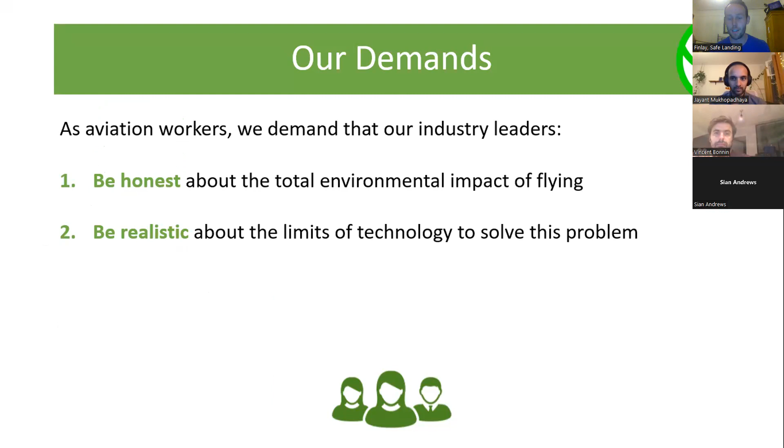We've got kind of 4 demands as a group of our industry leaders, of our business leaders. The first is to be honest about the environmental impact of flying. The next is to be realistic about the limits of technology to solve this problem. And this is where the talk from Jayant comes in today, looking at electric aircraft, which is often proposed as one of the solutions to the CO2 problem of aviation.

Then we want to be transparent about future regulations, what regulations are required to reduce emissions, and not lobby against those, crucially. Next, to have a plan that accounts for this and supports workers through any transition, because we think there needs to be a big transformation of the aviation sector and of the way we travel.

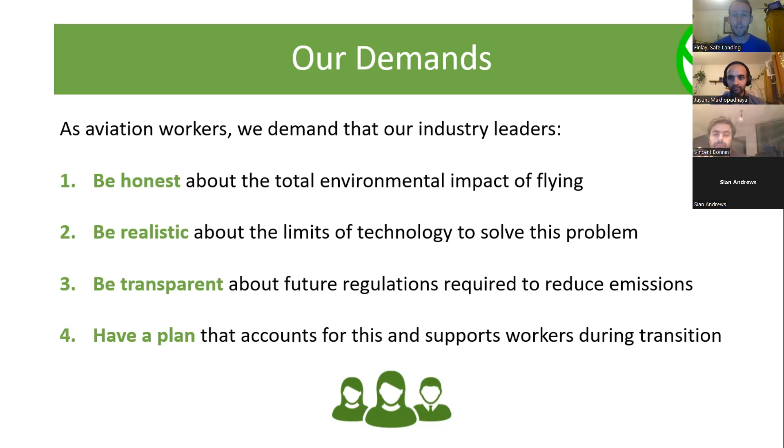Just want to also bring people's attention to a petition that we've got out now that's targeted at ICAO. Hopefully I've said that right, because I keep on saying it wrong. But yeah, it's the International Civil Aviation Organization. Now they've got a general assembly that's starting on Tuesday next week. And it's very much beating around the bush when it comes to actually dealing with the emissions from international aviation. There's an offsetting scheme that's very weak and very ineffective called CORSIA.

And we think, from our perspective, aviation workers aren't given a look into this, and our sector, as we see it, is heading towards disaster. So we've got a petition that's asking ICAO to give us the controls when it comes to the future destiny of our industry, and perform an aviation workers climate assembly as soon as possible.

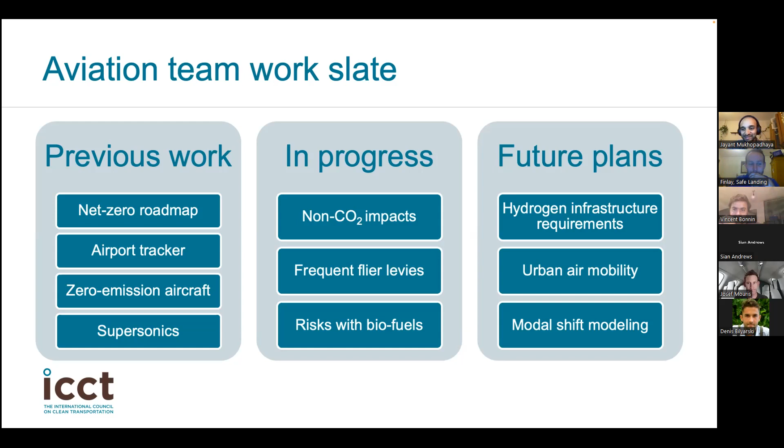Yeah. And so today I'll be presenting on electric aircraft, and the study focused on this particular question of what kind of impact electric aircraft could have on aviation emissions. Now, in passenger electric vehicles like cars, battery electric vehicles have become very popular and are growing rapidly. And so people often suggest that electric aircraft could have the same impact on aviation, and that's kind of what we were trying to determine here.

And also, like I said earlier, feel free to jump in with any questions. It's a few people, so it can be quite informal. But it is hard for me to figure out if you're raising your hand or anything, so just unmute yourself and interrupt me. I don't mind.

Now, having electric motors and battery-powered aircraft opens up the design space to some very funky configurations, like distributed propulsion along the entire wing to benefit from some aerodynamic gains. You could have wingtip rotors to counteract the vortex formation. So there's a lot you could do with electric airplanes if we didn't have to limit ourselves to a specific aircraft design.

So we did a very simple analysis just based on the electric range equation. It does simplify a lot of the physics, but it also provides guideposts for how much electric aviation could actually achieve. The aircraft parameters are based on industry standards, and if people are interested, I have some backup slides on the exact details of how we filled in the electric range equation. Yes, please. Well, I will get to that towards the end. I'll give the details of the results first.

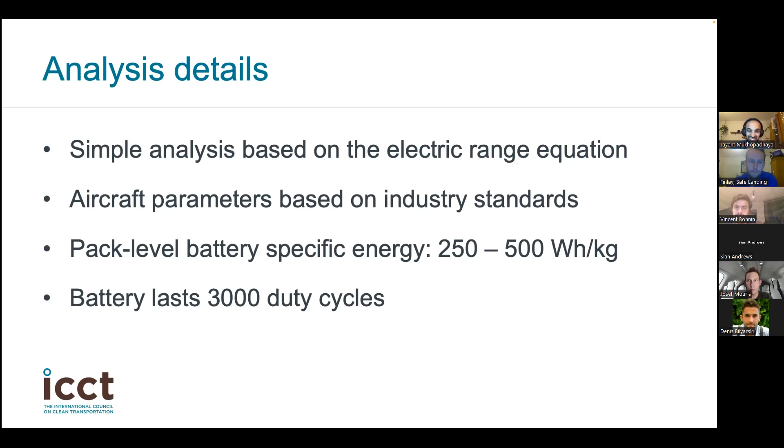And so, okay, with these sort of assumptions and using an electric range equation, we model 3 different sizes of aircraft: the 9-seater, 19-seater, and 90-seater. These are based on what is currently being investigated in the industry. And we gave them cute little names: 9Bolt, 19Bolt, and 90Bolt.

And so what this addresses is about 0.01% of the commercial aviation market in terms of revenue passenger kilometers, but a much higher percentage of departures, 2.6% of departures. That's because these are short flights that take off fairly often.

How do you get to 211 kilometers range on the Eviation Alice when they're giving like, I don't know, 800 or something kilometers range of the aircraft? Because they're expecting a very, very light aircraft. So, all right. The reason why we have such low ranges is because, let me show you the reserve.

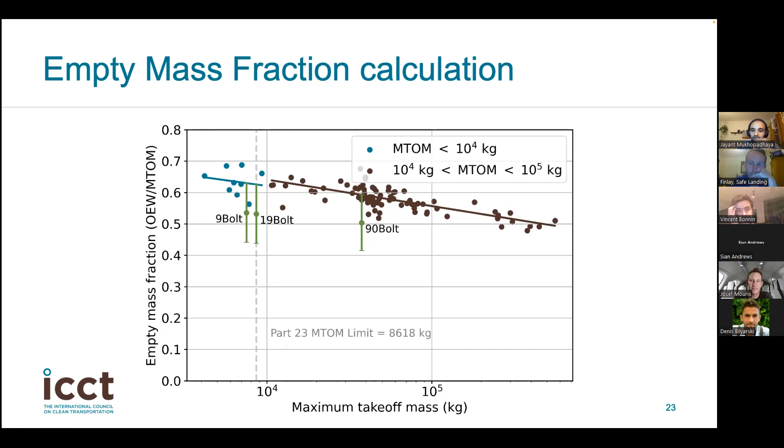So when you use like 250 watt-hour per kilo batteries, the operational cruise range, so minus all the reserves and everything, comes out to be about 250 kilometers at best if you have a 30% reduction in empty mass fraction compared to the state of the art. And that is a lot lower than what they're claiming.

The 19-seater from Heart Aerospace actually makes more reasonable claims, but I will come back to that in a second. They've already cancelled that program. They're now doing a 30-seater hybrid aircraft anyway. Yeah, and that's because so

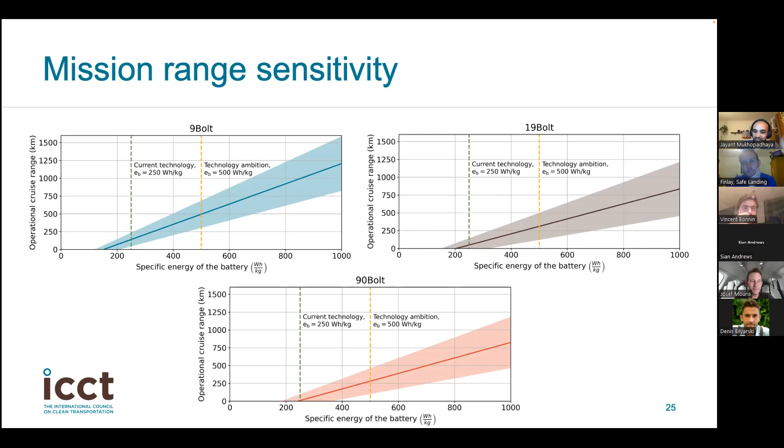if you increase, coming back to this, if you increase the pack level battery density from 250 watt-hours per kilo to 500 watt-hours per kilo, your 90-seater is almost coming close to the 19-seater, and the 9-seater is sort of a feasible aircraft. But this is also like 500 watt-hours per kilo on a pack level. So that's doubling what is the current best-in-class battery in the Tesla. I think it's the Model 3, which is about 250 watt-hours per kilo.

Don't know. I still think there's something wrong with your calculations. I mean, the paper has all the details of each parameter that we use. We have to make assumptions on L over D. We have to make assumptions on the takeoff mass, on the loiter speed, which is based on sort of a maximum lift coefficient value, and the empty mass fraction, which I just mentioned. And this is kind of what we come up with. But the details of the exact equations and the modeling are in there.

Do you have the link to the paper? Yes. I can find it if you want to keep on going. It was in the chat. Thank you. Was also in the invite, I think. Oh, okay. I must have missed that.

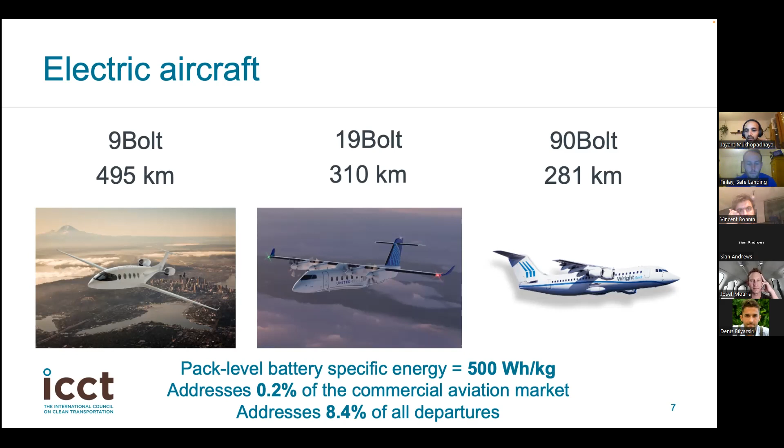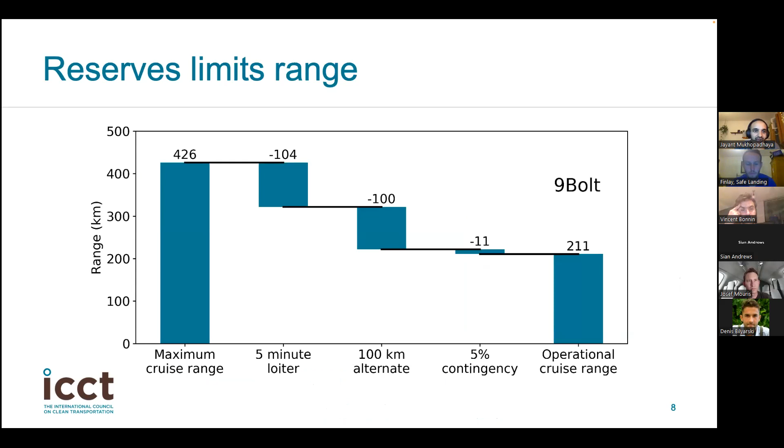And so, we get some severely limited range because of these reserves. And you'll also notice that, yes, the ES-30 has come out instead of the ES-19, because when you try and do a 19-seat aircraft and keep it below the Part 23 weight limit, which is about 8,618 kilograms, so that you have fewer certification restrictions on there, then you have an aircraft that really can't do much.

And that's why they shifted to a hybrid aircraft, which now they claim 200 kilometers only electric, 400 kilometers with hybrid electric, and 800 kilometers if you reduce the passenger size to 25 passengers. The 25 passengers will probably just allow it to carry more jet fuel. So that's why that range bump is so large.

But sorry, it's not all doom and gloom. Electric aircraft are significantly more efficient than jet-fueled aircraft. These are energy efficiency ratios. So this is how efficient it is at cruise condition. The 90 would be 3 times as efficient as the same aircraft but running on jet fuel, and 2.5 and 2.0 for the 19 and the 9-seater.

This actually gets even more compounded if you're comparing these electric aircraft to an equivalent zero-emission jet-fueled aircraft, where the jet fuel is actually e-kerosene and is made with renewable electricity, which then has an efficiency itself in production of about 50%. So only 50% of the energy that you put into producing e-kerosene you can get out of it. And so these energy efficiency ratios actually double when you compare it to a jet-fueled aircraft running on e-kerosene.

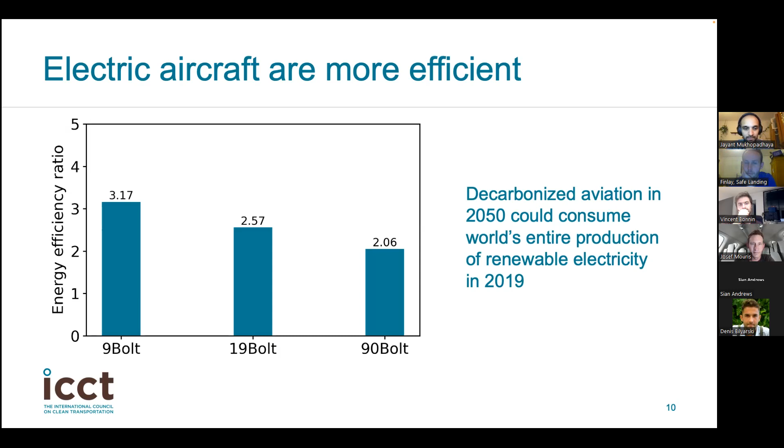One of the things that we finally want to see is also what are the carbon emissions of these electric aircraft. And to do this, we're comparing them across two different timelines, which is 2030 and 2050. 2030 assumes you have a 300 watt-hour per kilo pack level battery. 2050 assumes you have a 500 watt-hour per kilo battery pack.

jet aircraft. So sorry, just to make this clear, this is the electric aircraft being powered by just grid electricity. So you're literally just plugging it into the wall, and you still have a more efficient and less carbon emissions, even with the grid mix that is projected for 2030. It's better if you take into account the IEA's projection for what is a Paris Agreement compatible grid electricity mix. This is from their sustainable development scenario from their World Energy Outlook.

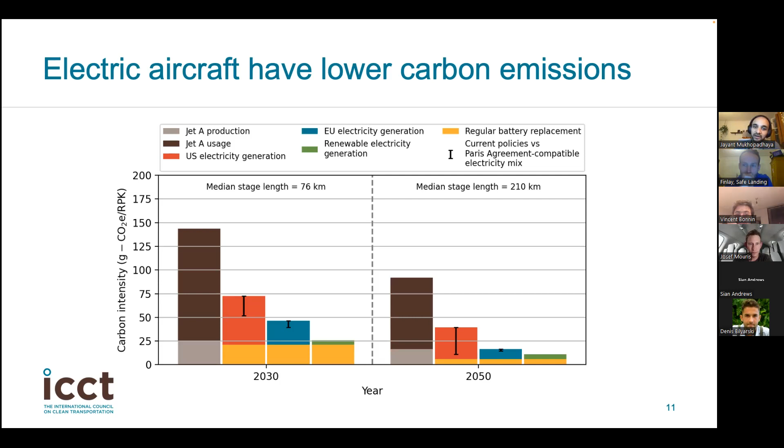And I think also there is a theoretical limit in the energy density of lithium-ion batteries. Yeah, I think it's around 2,600. And that's purely if you strip away everything about the battery and just have the anode and cathode, then you get that watt hour per kilo. Yeah, there's other solutions out there, but again, it's just nonsense. It's never going to happen. Aluminum air batteries. I definitely think that for long haul flight, we are going to have to use SAFs. Hydrogen doesn't make any sense either.

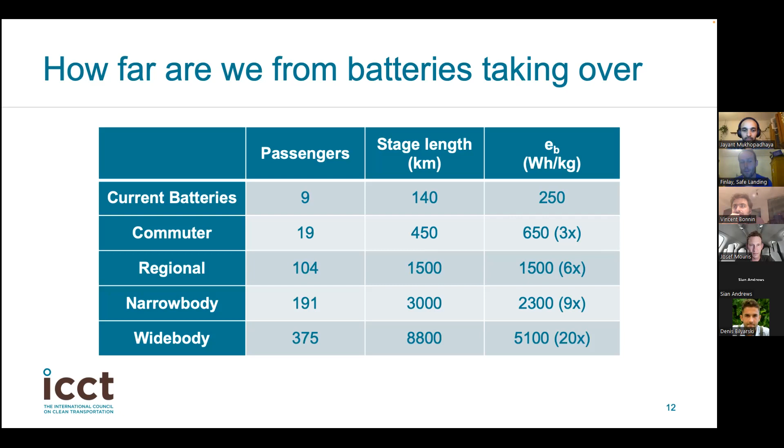Cool. So just with an eye on the time, because we're almost at 1:30, how much do you want to kind of just finish off your presentation, and we'll see how much time we've got left? Yeah, I mean, the rest of the presentation is nothing. These are just sort of recap slides.

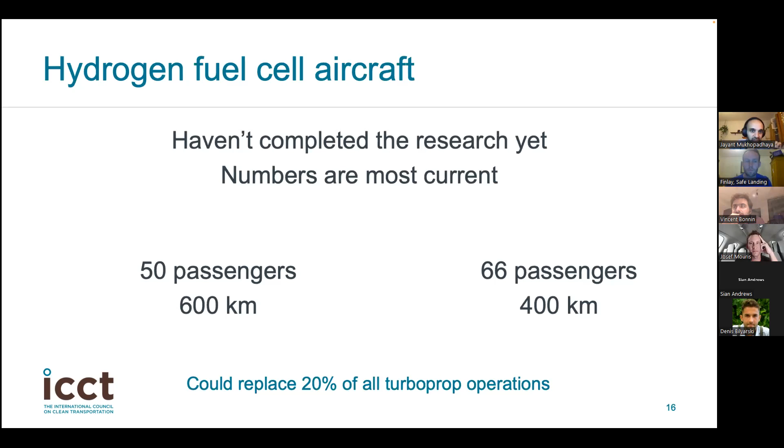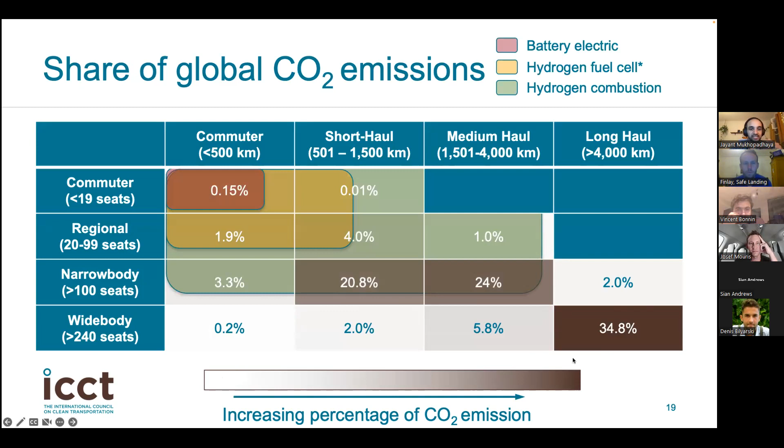I was going into an overview of what the zero emission technologies are, whether it's hydrogen fuel cell or hydrogen combustion aircraft, and kind of the markets that they would take up. So this is the overall aviation emissions attributed to different distances and capacities of aircraft. What you'll see is that narrow bodies, if you add these up, come up to about 50%. The single biggest chunk is the wide body long haul, or wide bodies in general are about 40 or 50% of all aviation emissions.

Battery electrics can take up this little part, and if Josef is also suggesting 1,500 kilometers, you could come up to here, but everything else would require either hydrogen combustion or SAFs, and those are both incredibly energy inefficient to produce. And so there's a lot of challenges with decarbonizing aviation, and like we talked about before, flying will likely get more expensive, and demand management through pricing increases will be a really important tool. And ideally, we want to be shifting as many people as we can to trains.

Yeah, so this is where the infrastructure thing is where I'm a little bit, like, I think for short distances, yeah, sure, take the train maybe.

Long distances, it's not really an option to take the train, and in fact, sometimes, right now, if I take my petrol or diesel car and I drive to the Netherlands on my own, I would actually produce more emissions than if I just go on the plane. But your baseline here isn't a very good one, because driving a single passenger occupancy car is horrendously inefficient. I know, but that's the option I have, because that's the car I have.

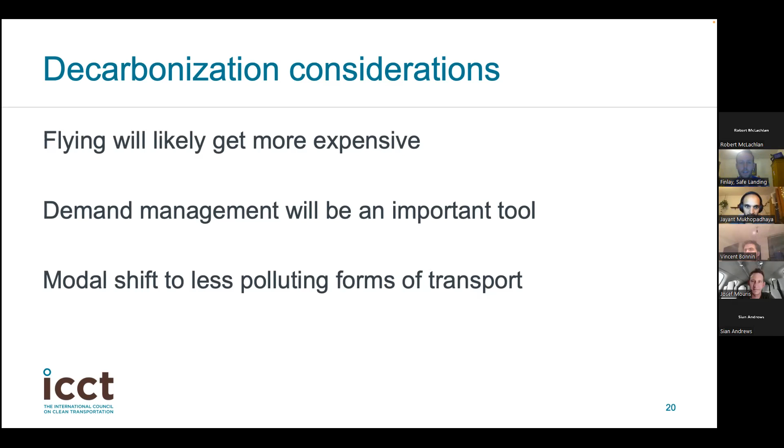And I think that's the interesting thing. My summary of that graph that Jayant just presented is that electric aircraft can't make much of a bite into the existing air transport network. But what's more interesting is at those smaller scales, the competition with other modes of transport and what the relative energy efficiencies are. And for me, it comes down to the cost of electricity for different things, which should probably be subsidized in different ways to benefit more efficient things. And I probably see a mix of electric aircraft, electric coaches and electric trains, because we can't build infrastructure for trains everywhere.

But yeah, I see that Robert's got his hand up, so I'm keen to bring you in, because you've not had a chance yet. So what's your question? Hey, Robert.

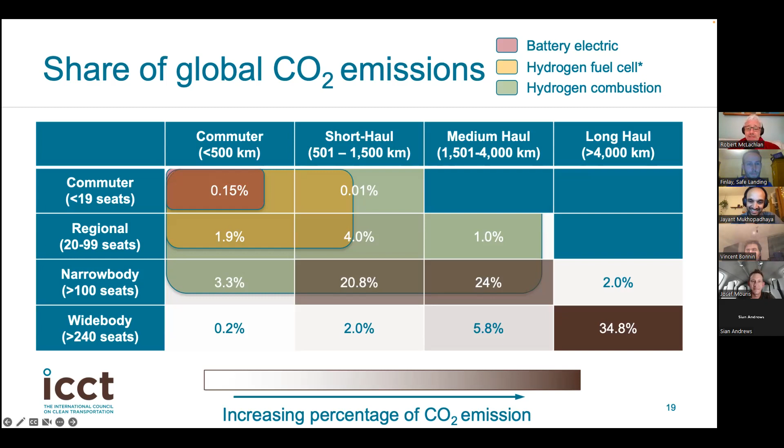Yeah, thanks. Good morning. So my question, Jayant, is about the news in the past week, which was that Heart Aerospace cancelled their 19-seat plane and announced a hybrid 30-seat plane. Now, you would agree, I guess, that the earlier model was never going to fly. It got a lot of media attention, and now the new one's getting media attention, and everyone's forgotten about the old one they were so enthusiastic about. So there's this very dangerous ecosystem between venture capitalists funding things that are never going to work and the media jumping on them. I'm concerned about that aspect of the transition we're just starting now. What's your view on that?

Yeah, I wouldn't say I was surprised by it, but I'm surprised that they went for a 30-seat hybrid. Mostly because the papers I've read about hybrid electric powertrains usually say that it's extremely heavy, and that's a penalty that becomes prohibitive. And I forget who on this call was... Vincent. He does research on this, so he might be able to talk more about it. But these numbers on the face seem reasonable in terms of technological feasibility. Whether it makes economic or environmental sense, I'm not 100% sure about. The new model, the hybrid model.

Mm-hmm. Well, the idea is that you basically don't touch the jet fuel unless you need to do a diversion mission. So you would essentially be flying fully electric until you had an issue and realized, actually, we need to divert, we need that extra range capacity.

And that then means you don't carry as much dead weight batteries most of the time. But I don't think they've made it clear what sort of hybrid electric it is, whether it's like a jet engine that's driving a generator. Yeah, it's two generators in the back that are supposedly range extenders, so they should only come on when you've depleted your batteries, so to say, which means that they've got a power rating that actually allows them to carry on flying when that happens.

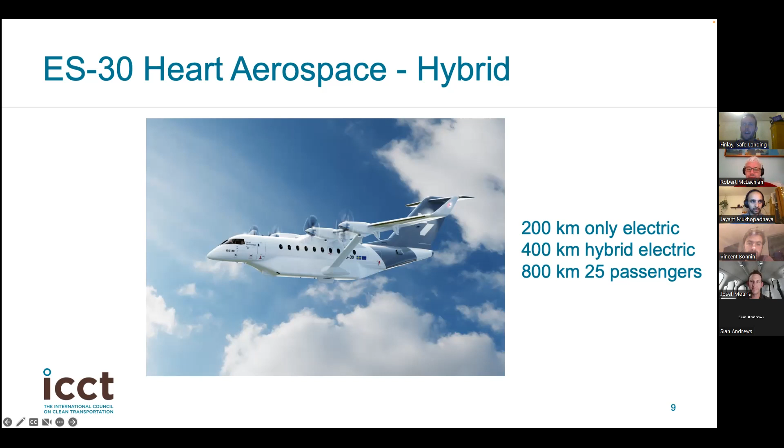Just on the safe landing perspective on this. I mean, going back 5 years, I was quite a big advocate for my company Rolls-Royce working on electric stuff, even if it was eVTOL, because that's where the investor money's going. It looks really shiny and fancy. Investors are giving billions to it, and it's a really good place to rapidly innovate on smaller, lighter electrical systems that can then be applied to more reasonable, probably fixed wing aircraft.

But over the last 5 years, I've got more and more disillusioned with that, because you can see the insane amount of money that's going into these aircraft that really don't make any environmental sense, yet are labeled as pioneering sustainable aviation. And this is true for both the supersonics and the eVTOLs. I kind of see an eVTOL like an electric SUV of the sky, right? It's really not what we need to do when it comes to sustainability.

Isn't the good news here that Rolls-Royce pulled out of being the engine manufacturer for Boom Supersonic, and now all the other manufacturers are also saying no, thank you very much? Yeah. They did just today hire the ex chief technology officer of Rolls-Royce, though, to give them some credibility. And I've had a bit of a debate with him on LinkedIn today.

But yeah, just to finish that point. I just think it's a great shame, really. There is so much investor money, and it's not, in our opinion, going in the right places, because there's so much work to be done to transform the aviation sector.

You know, maybe the future is much more small local airports, much lower payload and speed and smaller aircraft flying a more distributed network. Maybe there's some role for hydrogen as well. I don't think anywhere near as much as we're currently flying, and we will need to fly a lot slower to really conserve energy, even more so there. But that is so much engineering work, so much infrastructure design change, and we needed to have been getting on with it 20 years ago.